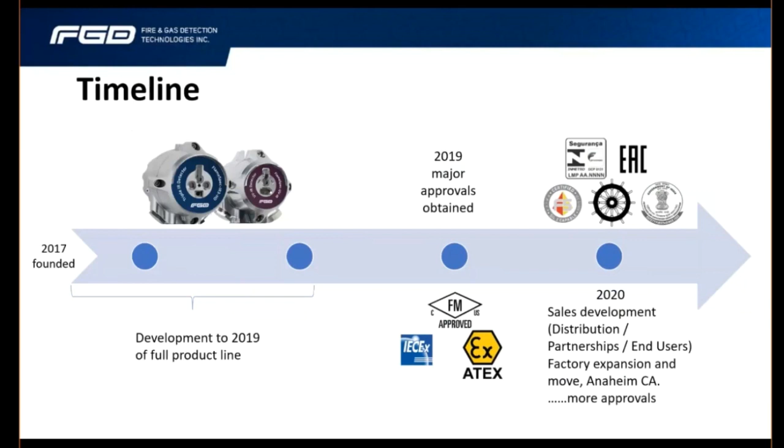In 2021, we continued to expand our distribution network, increase market awareness, and of course, add more approvals. We've also started development of an open path gas detector platform, and we'll present more on this at a later date.

And so today we have two flame detector product lines matching technology with fire risk and application considerations. The technologies cover UV-IR for hydrocarbon, metal, and inorganic fires, IR3 for hydrogen, silane, and some other special applications, and of course IR3 for visible and invisible hydrocarbon fires. The two product lines were developed to have the same flame detection and fire alarm integration capabilities. The main difference between the two lines is with the video capability of our HD detectors. We will learn more about this in this presentation.

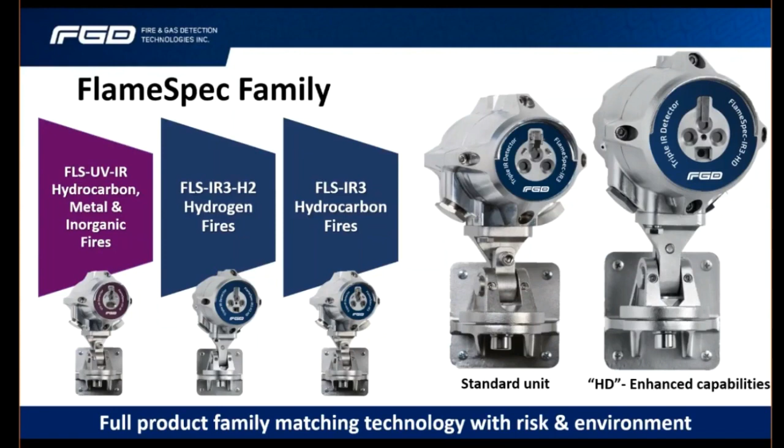Right now, we will pause to quickly review what affects flame detector response. Our starting point is always what is going to burn. A large luminous smoky flame like crude oil, or a low energy near invisible flame like methanol burn very differently. Whichever it is, we must ensure the flame detection technology selected is able to respond to the fuel burning.

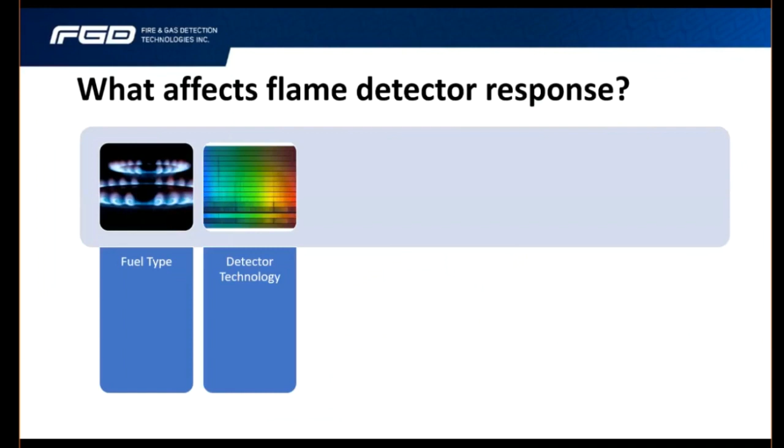Detector sensitivity and distance from the fire are very much linked factors. We then need to consider the detector field of view in both the horizontal and vertical planes. As a side comment, you might find it interesting to learn that a field of view greater than 90 degrees in the horizontal axis does not always equate to better performance. I'll leave you with that thought for now, as we will discuss this point further in the presentation.

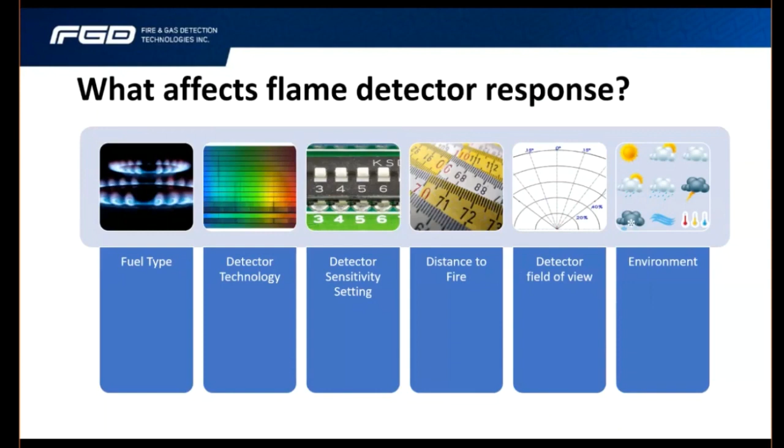And another point to consider is the environment in which the detector is installed. For example, the demands of a detector in an acoustic enclosure of a gas turbine is very different to the challenges posed by the depths of winter in Canada or Kazakhstan. And last but not least, we must turn and consider false alarm sources.

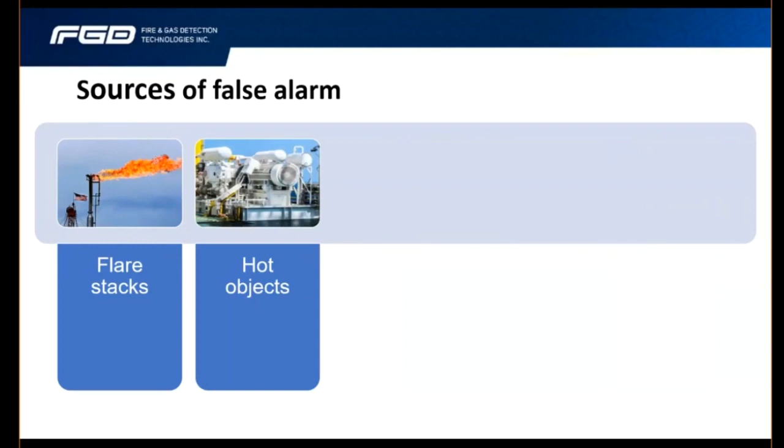Flare stacks are friendly fires. The challenge is that no flame detector can tell the difference between a hazardous fire or a friendly one. Care and attention with the installation, linked with mechanical blinkers and sensitivity reduction, can normally help minimize false alarms. Hot objects, as we will see in this presentation, can cause issues for some flame detectors. The main recourse here is to reduce sensitivity. Sunlight and sunlight reflections can be an issue for some flame detectors. Mechanical blinkers may help where this is an issue.

When hot work is being conducted in close proximity to a detector, it is normal to isolate the alarm outputs. The main historical issue relates to arc welding and UV detectors, although activities where heat is produced, such as grinding and cutting, may be an issue for some IR flame detectors. And finally, hot CO2 or carbon dioxide emissions can cause some multispectrum IR detectors to alarm if they are mounted in close proximity to the source.

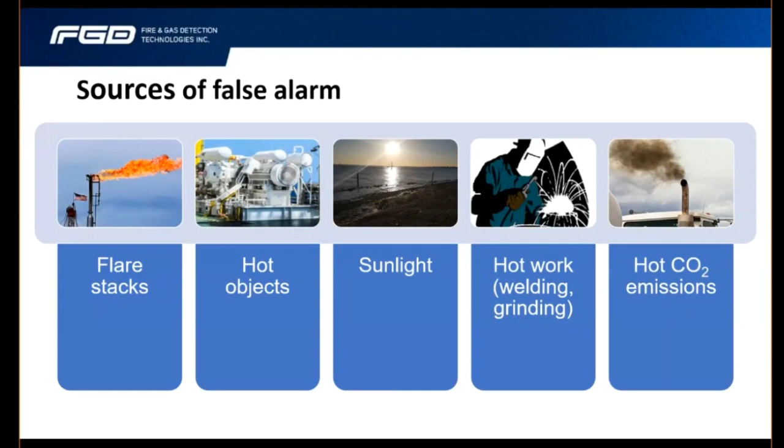This issue can be resolved by relocating the detector, or if this is not an option, other solutions may be available. The challenges posed by the fire risk, application and installation and presence of false alarm is a complex one. So when we take these points into consideration, we must always ask, is there a perfect flame detector? And as always, the answer is no. All flame detectors have strengths and limitations.

Therefore, when selecting a device, it is important to use the most appropriate technology for the application. This is, of course, why we have a range of products and technologies that match the challenges of the installation with the detection performance needed. In this webinar, we will be focusing on the FlameSpec FLS-IR3 hydrocarbon flame detector.

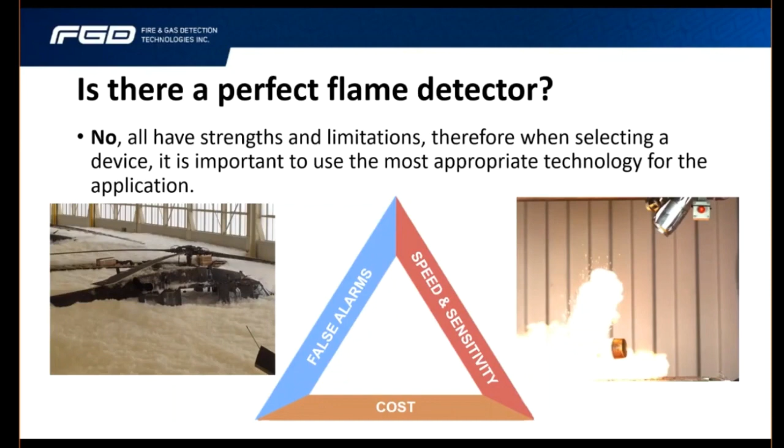So, what have we developed? Well, we developed a detector that in a single unit responds to explosions, fast fires, slow evolving fires, small fires, and big fires. The detectors work indoors or outside over an extremely wide operating temperature range. The detectors have best-in-class response to a broad range of fires and outstanding false alarm immunity, all of which is approved by Factory Mutual.

In a single unit, we deliver as standard fire and fault relay contacts, a 3-wire 4 to 20 milliamp, both current sink and current source, an isolated 4-wire 4 to 20 milliamp, and an RS485 port utilizing Modbus RTU. We also include heated optics, adjustable sensitivity and time delays, all again as standard. What is more, all of our detectors are delivered with a 5 years warranty. As mentioned earlier, our HD units provide a live video feed and high-speed recording of events, 1 minute before the alarm and up to 3 minutes after it.

I'm sure you now want to know something of the detail of what we've actually done. So, with a mature technology, it's unlikely that dramatic improvements in detector performance would occur due to changes in any one area. In the following slides, you will see that subtle incremental changes based on years of product knowledge have culminated with the development of the FlameSpec FLS-IR3.

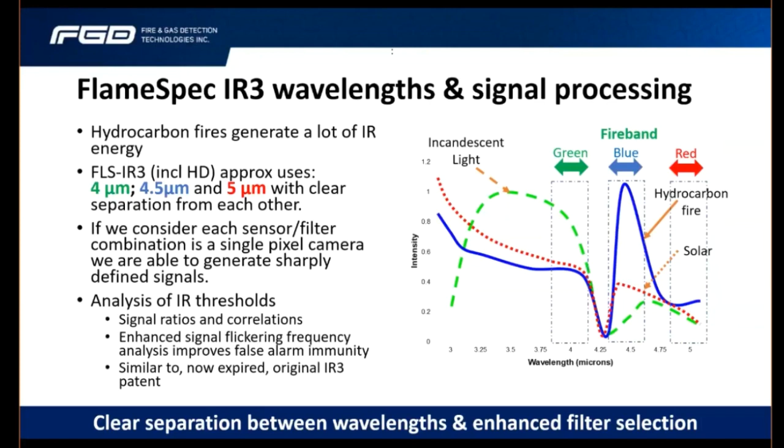This means that the analysis of thresholds, signal ratios, and correlations can be conducted more quickly. This, coupled with enhanced signal flicker frequency analysis, improves positive fire detection and false alarm immunity. Naturally, the algorithms we employ and develop are key to the detector performance. We will look at that now.

Non-fire events were tested at very short distances, as typically these were less of an issue the further removed from the detector you were. Typically, we examined arc welding, electrical arcs, modulated and unmodulated objects, as well as direct and indirect sunlight. The information we captured directly related to the factors we used to differentiate fire from false alarms.

Inside each FlameSpec FLS-IR, there are over 50 factors that are monitored as part of the detection and false alarm rejection algorithms. Algorithm revisions are validated against the vast library of data for fire and non-fire events to ensure changes only have a positive performance impact. In the next 2 slides, we will present a brief glimpse of the 3 signals the FlameSpec FLS-IR uses.

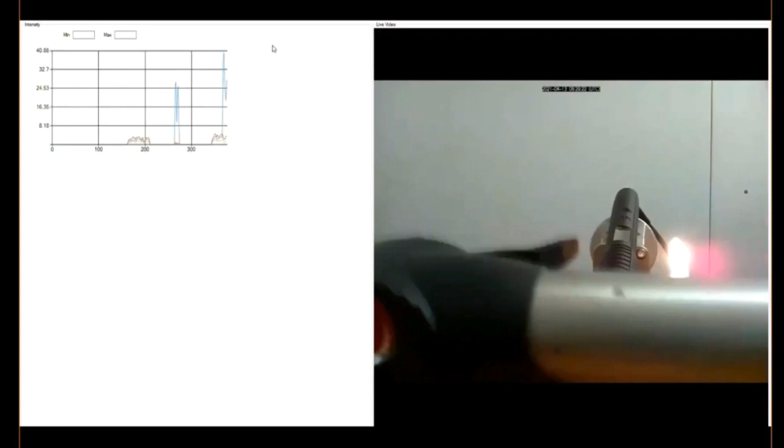This time, watch as the 3 signals are generated due to the modulation, and then what happens when the flame is introduced. You will see that the correlation of the guard band wavelengths remains closely matched, and that the response at 4.5 microns is very strong. The detector correctly identifies that a flame is present. One other point just to note was that the traces were all continuous, so I promise you there's no smoke or mirrors or video editing going on there.

Next, we need to look at our enhanced optomechanical design. The FlameSpec fascia gives it a very distinctive look and feel. Unlike some competing products, we have no need to use sunshields to stop water dripping into the detector optics. This is because we have a brow that forms part of the stainless steel casting. The 3 IR sensors sit behind a heated sapphire window.

The FlameSpec design uses a heating element in direct contact with the window, as this is a more efficient way of heating the optical surface than using an array of resistors mounted more remotely. As a result, we have lower power consumption than many competing devices.

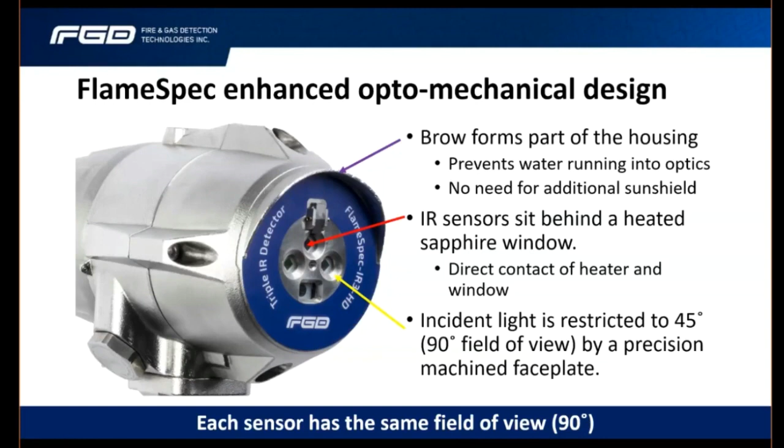Finally, each sensor sits in a precision machined pocket where incident light is restricted to 45 degrees either side of the central axis, thereby giving a 90-degree horizontal field of view. It is important to stress that each sensor, rather than the detector as a whole, has exactly the same field of view. Let us review this in more detail.

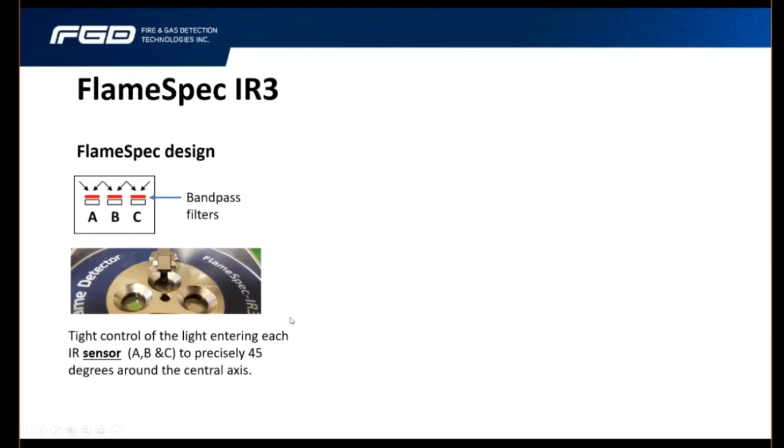Looking at the FlameSpec design, we can see each of the 3 sensors is tucked behind a bandpass filter, selected to the wavelength of interest, either 4, 4.5 or 5 microns respectively. As mentioned previously, this precision machined pocket restricts light to 45 degrees either side of the midpoint, thereby giving each sensor a horizontal field of view of 90 degrees.

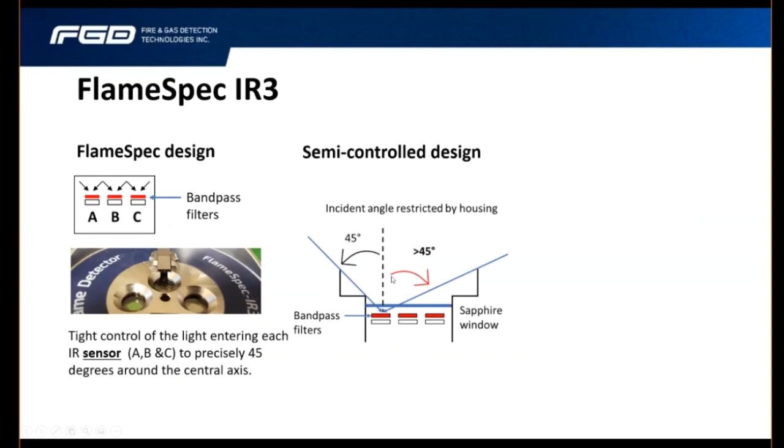If we consider an alternative semi-controlled design, the detector may claim to have a field of view of 90 degrees, and it is clear that light entering the extreme left of the sensor onto the left is restricted to 45 degrees, but light to the right-hand side of the center point is unrestricted. I'm sure some of you are asking, why is this important? Well, the challenge faced by this design is called blue shift.

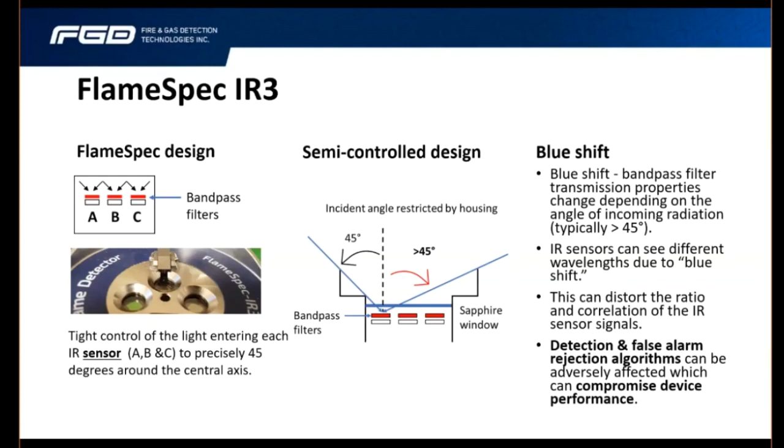In basic terms, the transmission properties of a bandpass filter change depending on the angle of incoming radiation. When infrared energy enters from angles greater than 45 degrees, the sensors see different wavelengths. This unwanted additional data can distort the ratio and correlation of the signals received, which may impact the ability of the algorithms to correctly differentiate fire from false alarm, meaning that the device performance may be compromised. Moving on, let's have a quick look at our design.

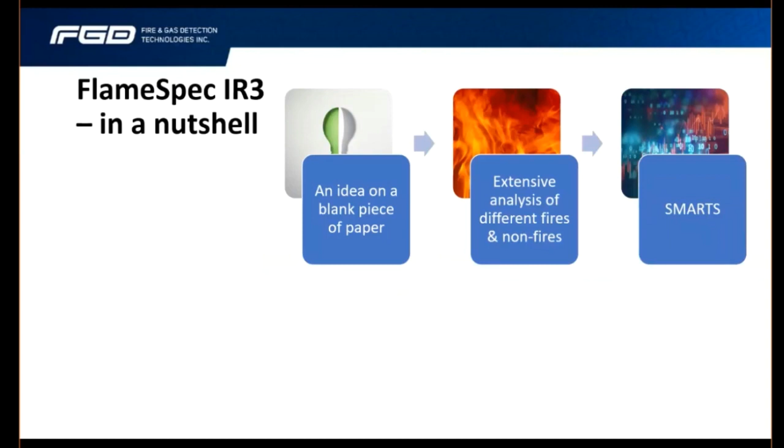Pictorially, this slide represents the journey we've been through with our FlameSpec FLS-IR3 development. We started with a blank piece of paper and a mature technology. We knew that dramatic improvements in detector performance would be unlikely due to changes in any one area. We therefore started to capture data and video of fire and non-fire events and developed algorithms from scratch using this data as input.

We've already seen how our optomechanical design tightly controls light entering the sensors and why this is important. The integral visor simply stops water from dripping into the optics, which are heated to prevent ice or condensation. The PCBs are tropicalized and the termination compartment is integral to the detector but segregated, which usually makes for a less problematic installation.

We also have possibly the most complete range of outputs that can be purchased in a single part number. A 3-wire 4-to-20 current sink and current source, as well as the isolated 4-to-20 milliamp. We have fire and fault volt-free contacts and an RS485 port using Modbus RTU. But we're not finished there. We also offer detection to explosions.

Our ultra-fast detection mode is available in all FlameSpec detectors and uses an independent and parallel detection path to our standard flame detection algorithms. Ultra-fast detection does not affect the speed, sensitivity, or any other aspect of the standard detection mode. Similarly, the sensitivity and alarm delay settings do not have any impact on ultra-fast detection. The ultra-fast response for our IIIR detectors is 40 milliseconds to fireballs and explosions at short distances.

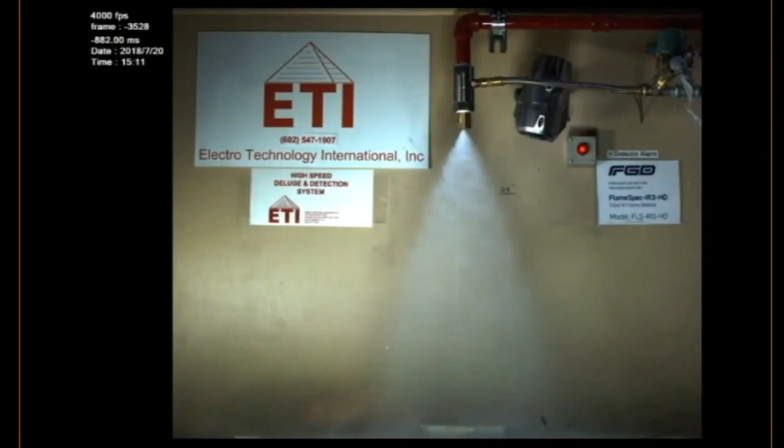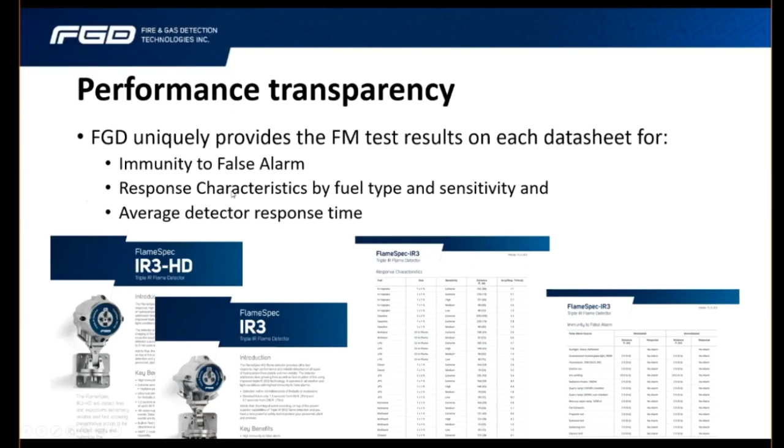Okay, now let's explain a bit more about the published data that we have. In the next few slides, we will show in more detail the performance levels we've achieved with our FlameSpec IIIR detectors. To my knowledge, FGD uniquely publishes more FM data in our product data sheets than any other manufacturer. The details published include detection distance and response times to different fuels. We also include the results of immunity to false alarm in both modulated and unmodulated conditions. Let's look at some performance data.

Let me explain a little about this slide. The response times shown are the average response per our FM test report. The fire under test is the same. It is the standard 1 square foot or 0.1 meter squared N-heptane fire at each distance. This means as we move further from the detector, the radiant energy it receives reduces. This essentially matches the inverse square law.

So if we double the distance from the detector, it can only see a quarter of the energy that it saw at the shorter distance. In order to maintain detection, we manually increase device sensitivity. One interesting point to highlight is at the limits of detection. Looking at the extreme sensitivity to the right-hand side of the slide, you can see this is around 80 meters for this fire type and size.

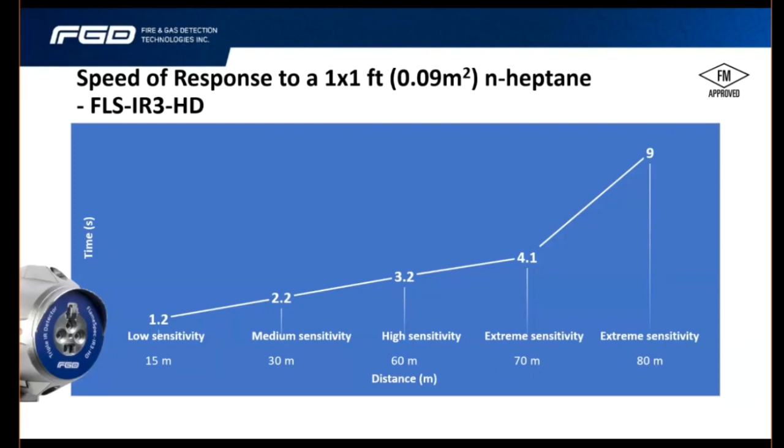You'll also see that the detector takes longer to decide if a fire is present at 80 compared to 70 meters. This is because the detector runs additional validation checks when the received fire signal is low. Let's now look at some other of our FM data.

Here we present performance data extracts of our IIIR and FLS-IR3-HD product data sheets. The information shown relates to different fires, including liquids, gases, and solids. The detection distance and average response time is given for the stated fire size and sensitivity. I'll give you a few moments just to scan the data. Whilst you're doing so, I'd like to point out a couple of things.

First of all, the response time for the two detector types are broadly similar, but not identical. This is simply due to the experimental setup, as the fires were not conducted simultaneously. As a side comment, we do have some simultaneous fire test examples later in this presentation, where you'll see much more correlation in the speed of response because the detectors will see the same fire.

Secondly, it's worth pointing out that the detection distance is not fixed. For example, our IIIR can see beyond 80 meters if you look at the response data for the 2x2 gasoline fire, but the fire must be bigger to do so.

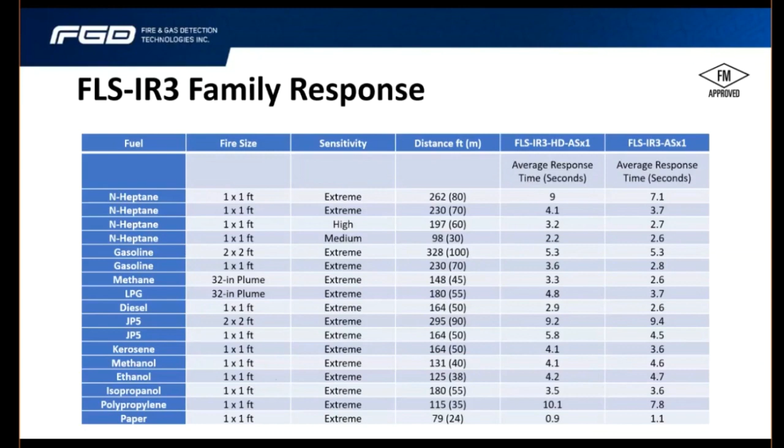Moving on. The information presented on this slide relates to the factory setting of both units. Most manufacturers' default is medium sensitivity, which typically means 30 meters or about 100 feet to the standard N-heptane test fire. Whilst the list of fuels shown is not exhaustive, the data presented is FM approved. Generally speaking, I think the data shows the FlameSpec to have a more uniform response across different hydrocarbons, whilst at the same time giving improved sensitivity and speed of response.

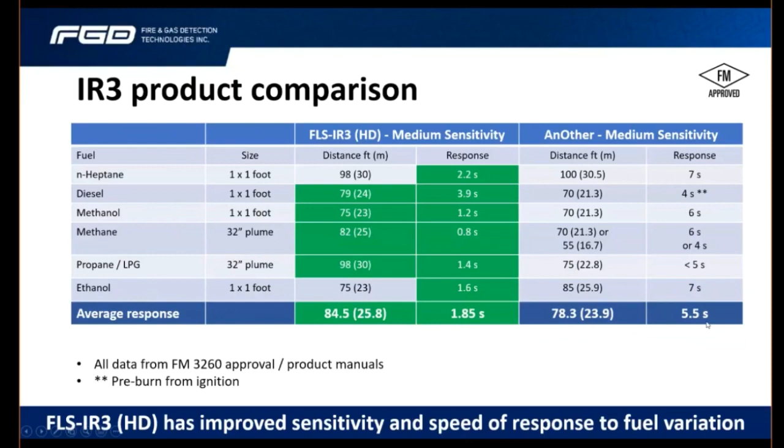A couple of slides back, I mentioned that we would see some simultaneous fires, and this is an example. Here you see there's a much closer correlation between the speed of response of our detectors.

And now I have another quick poll for you. So there's 3 questions to answer just based on some of the information that we've seen. You have approximately a minute to respond. We're just waiting for a couple of respondents to complete the poll. I'm happy to say that you've been paying good attention, so thank you very much for that.

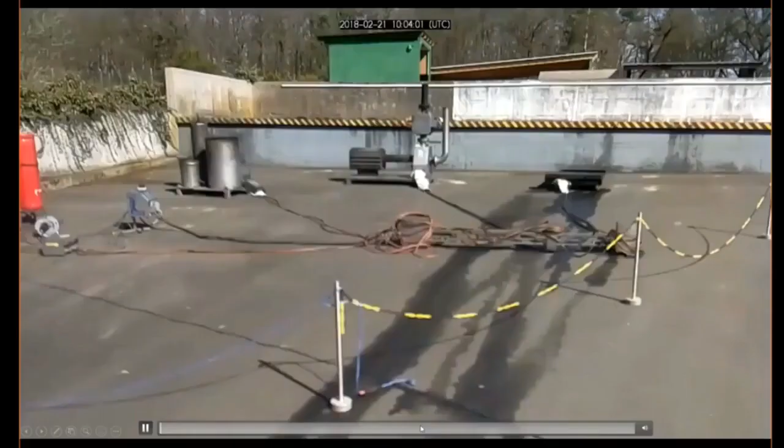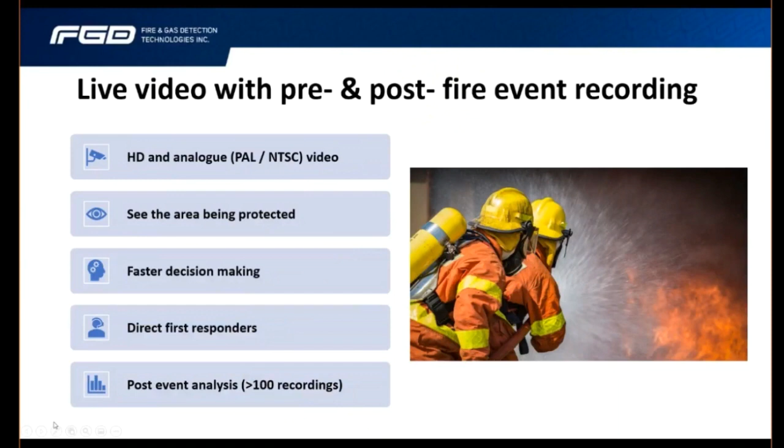There's the time and date stamped information, and you'll see the detector responded. The event video feed can be extracted using a web browser, the ONVIF device manager, or our own FGD Communicator. By way of a quick introduction, here is our FGD Communicator.

This software is required if changes are needed to the configuration of the detector when shipped from the factory. The main features of the software are the ability to communicate using Modbus over an RS-485 port. Parameters such as sensitivity, the ultra-fast response, the delay time, latching of relays or the standard 4 to 20 milliamp signal, the selection of the heater, and also whether you want video on or off, or whether you want to select PAL or NTSC video, are all available through a password protected environment.

The software can also communicate with the FLS-IR3-HD via an Ethernet connection that allows live streaming of the video and the ability to retrieve event recordings. In the next few slides, we will cover detector testing, approvals, and accessories.

Testing can be conducted externally using one of our ATEX-approved flame simulator kits or via a manual built-in test. If testing is conducted using the test torch, the detector outputs are activated and a complete system check is performed. The manual built-in test has two options. One that simply tests the detector internals and the cleanliness of the optics, and the other that performs a full loop test in much the same way as the test torch.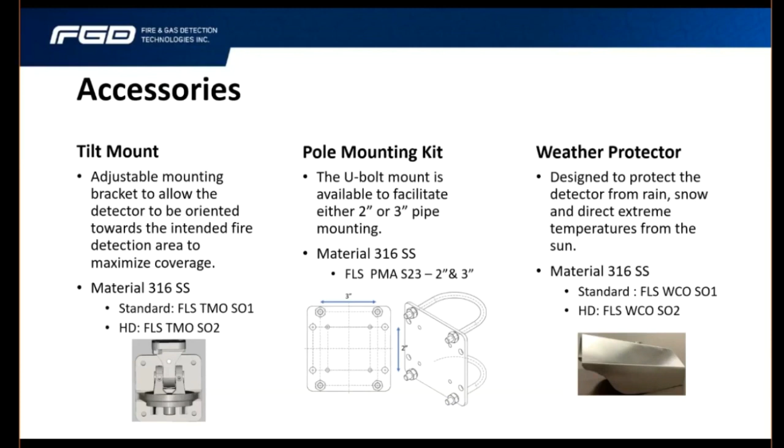If customers insist, we can also supply sunshades as well. And the latest addition to our range is an air shield. This item can be supplied either for the standard or HD detectors, and the air shield uses compressed air to blow an air curtain across the detector window, thereby preventing accumulation of dirt on the detector or the camera window.

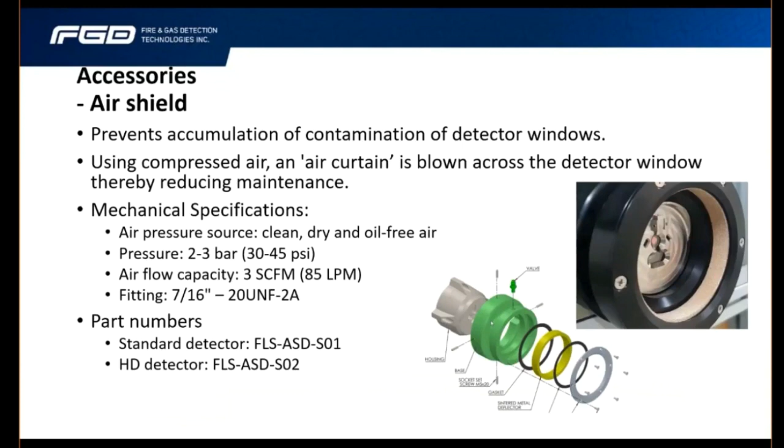Now looking at some applications, we're able to satisfy a wide range, from the most obvious like offshore marine, LNG, tank farms and refineries, things also like large vehicle protection, loading racks and compressors, to the less obvious, aircraft hangars, waste transfer stations, biomass facilities, recycling centers, waste to energy plants, battery storage, spray paint booths and others.

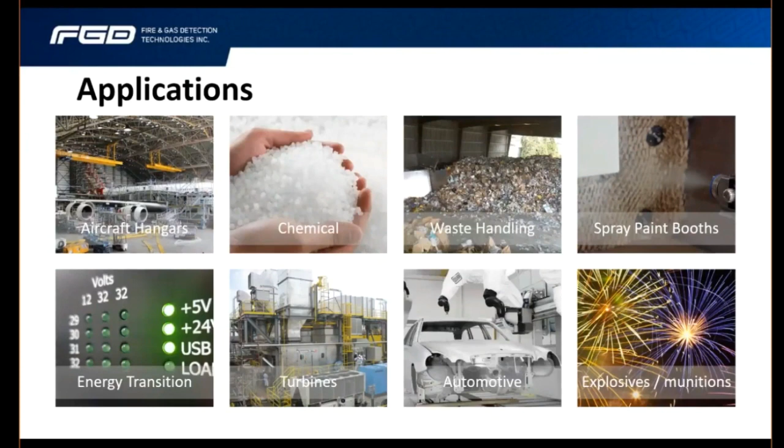And our HD units are ideal when remote monitoring of site or process is needed. Applications like normally unattended facilities, gas plant, remote tank farms or pipeline booster stations spring to mind for the use of the video. We're now coming towards the end of our presentation.

I'd therefore like to summarize our development in this our webinar entitled Delivering New Performance Levels in Optical Hydrocarbon Flame Detection. By way of a summary, I'd like to mention what we discussed. We had a short overview of fire and gas detection technologies and how we developed since being founded. We then summarized flame detection technologies and what affects detection and false alarm immunity. The main focus of this presentation has, of course, been our FlameSpec FLS-IR hydrocarbon flame detectors. We discussed how we started from a blank piece of paper and a mature technology.

We knew that dramatic improvements in detector performance would be unlikely due to changes in any one area. We therefore started capturing data and video of fire and non-fire events and developed algorithms from scratch using this data as input. We saw how our optomechanical design tightly controls light entering the sensors and why this is important.

The integral visor simply stops water dripping into the optics, which are heated to prevent icing or condensation. The PCBs are tropicalized and the termination compartment is integral to the detector but segregated, which, as mentioned before, usually makes for a less problematic installation.

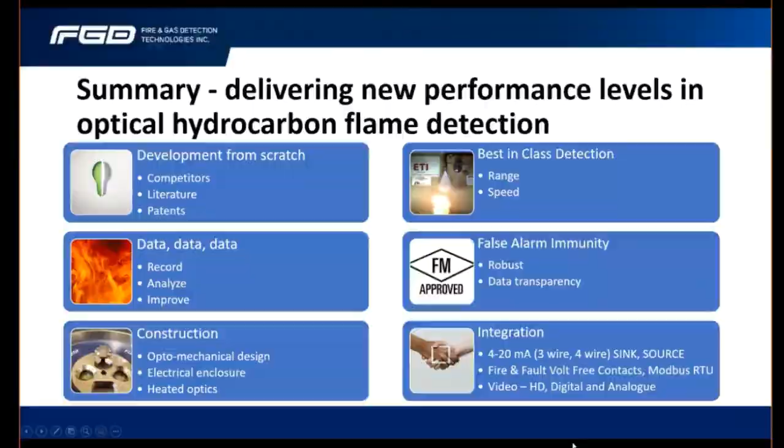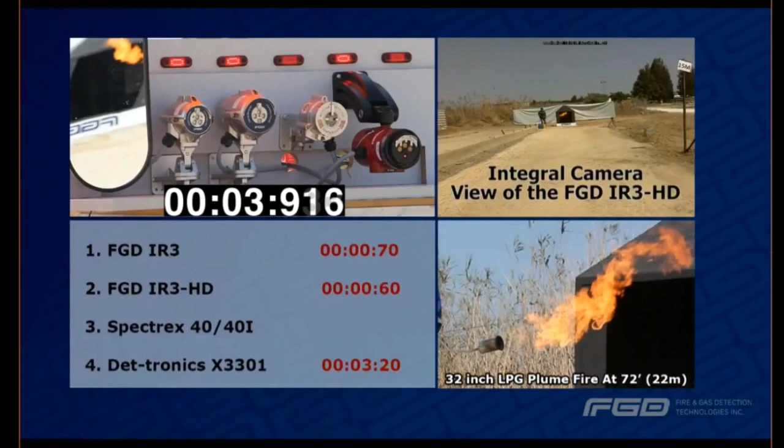The intention again of this video is not to knock the detectors of the competitors. They are high quality and they respond in a timely manner. We're simply wanting to demonstrate the additional speed gains that we have achieved. Naturally enough, all the detectors are configured in the same way. And as before, I'd just like to mention how closely our detectors actually match one another.